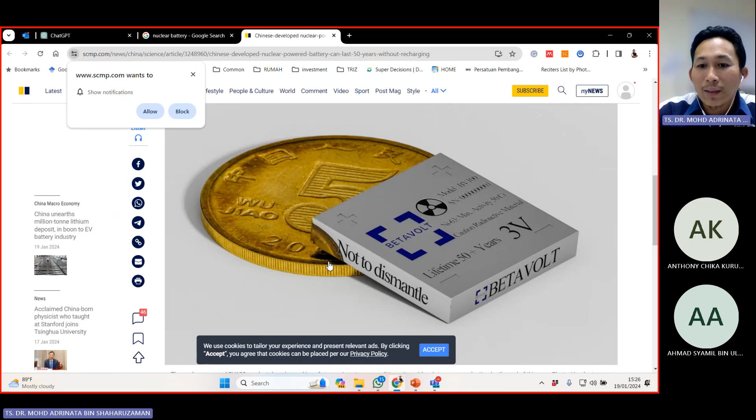Just this week, this one - nuclear powered battery, this is news from yesterday. Chinese developed nuclear powered battery that can last 50 years without recharging, smaller than a coin, and it lasts longer. So this is just research in China for battery.

So the current research is about making the net energy density of the battery higher, so you have a smaller size battery with high capacity that can move the car. Then it will be ideal for us to use electric vehicles rather than put an extra weight of 500 kilograms onto our car to put the battery on the vehicle. So that's the issue.

And how do you compare how big, how much volume, 1 kilogram of iron metal is? Okay, 1 kilogram of iron metal is something like this. But how big is 1 kilogram of cotton? Same 1 kilogram mass, but the cotton is, I think, the size of your whole room for 1 kilogram, something like that. So that's the comparison of the energy density of the fuel, of the gasoline and the battery.

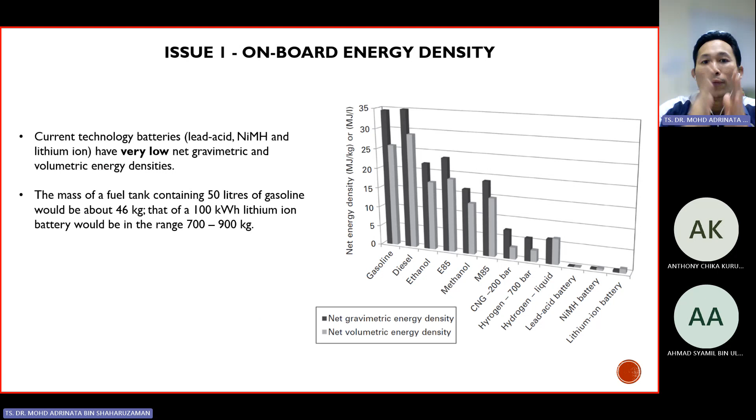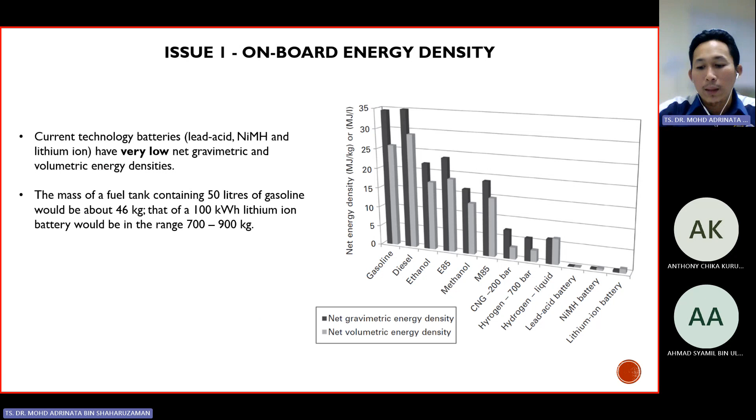Of the fuel of the gasoline and the battery. Okay, so we want the smaller size but give higher energy.

Next, it is about cost. If you add something new technology, it will cost you higher. So the key to enabling widespread availability of sustainable transport is to provide a solution which customers can afford to purchase. It's all about market survey. So we want the new technology with lower price.

Okay, so if we compare something like vehicles that we have, let's say Honda City, Vios, with new technologies of ADAS system, Toyota preventive system, something like that. So comparing Honda and Toyota at 100,000 ringgit, with Perodua Ativa, Perodua Alza at 75,000 ringgit. So that's the comparison of affordability by consumers. We want to introduce the new technology with lower price.

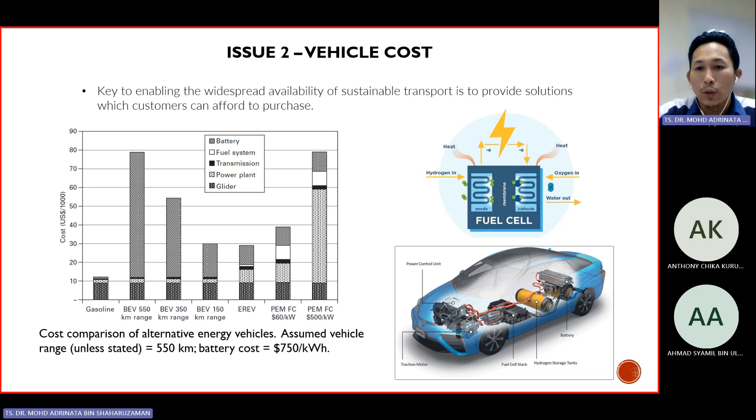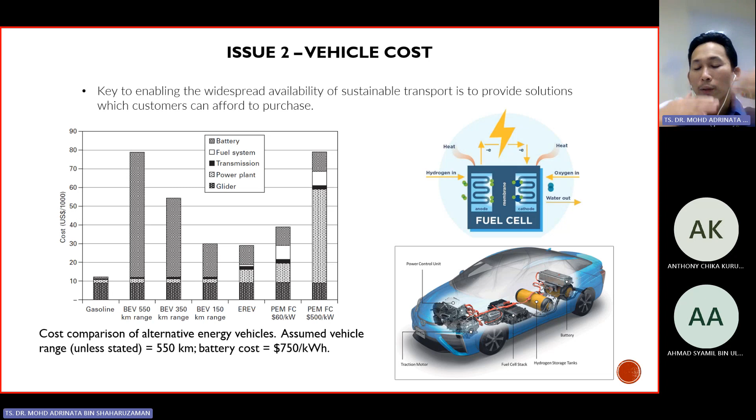We need the electronic control module to define which one we need to use - either petrol, gasoline, or the battery. That's how we use the electronic control module, so the jerking of starting and stopping the ICE engine will not be felt by the passengers. That's the study.

Next we go to the market penetration of biodiesel. Biodiesel has been used in Malaysia - about B7 and B10 biodiesel. I think biodiesel is up to B20 as of now, but research is currently going on for more than that - B30, B50 still in research.

Renewable liquid fuels are potentially a pragmatic route to decarbonizing transport because they provide an evolutionary transition for both vehicle technology and fuel distribution infrastructure. The EU dominated production of biodiesel in 2009, 15 years back, at 54%. Then US, Brazil - about 75% of EU biodiesel is made from rapeseed.

So we have rapeseed oil, soybean oil, palm oil. Asian countries like Malaysia and Indonesia use palm oil. China and India produce 2% and 1% of the world's biodiesel.

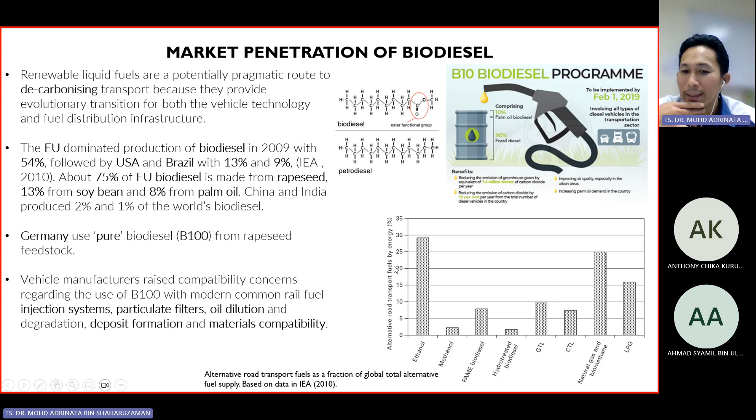Hydro-treated biodiesel, GTL, CTL, NGV, biomethane, LPG. Natural gas is NGV, LPG is what we use in Malaysia - we use LPG gas in cooking.

Let's look at the penetration of alcohol fuels back 10 years ago in the market. Alcohol fuels have a great octane number, so high octane, reducing knocking - a knocking inhibitor in gasoline, until tetraethyl lead came to dominate the market. Before this, alcohol fuel was very good, but tetraethyl lead caused health concerns because of the lead.

Plumbum - the US produced 56% of the ethanol consumed by the road transport sector, Brazil 33%, and European Union 4%, in 2009.

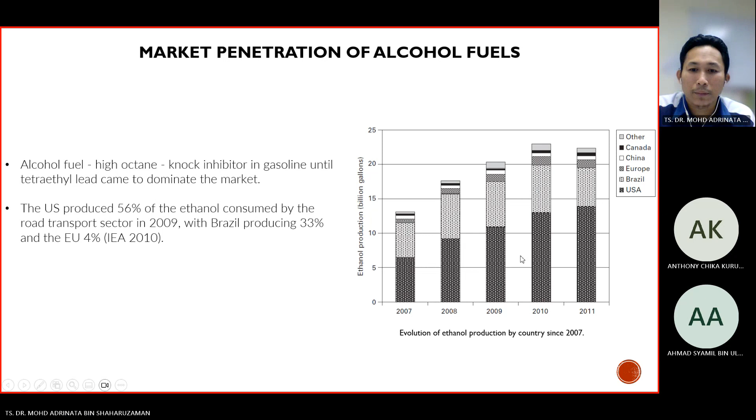So that's the fuel. Now alternative and renewable liquid fuels to improve the environmental performance of the ICE engine. This part is explaining the engine fuel for the engine, how to move the car.

From pure petrol, gasoline, pure diesel, going to ethanol, methanol, biodiesel, and up until the fuel cell - PEM, proton exchange membrane fuel cell.

Fatty acid methyl ester is dependent on the distribution of fatty acids in the original oil - this comes from rapeseed oil, palm oil, and soybean oil.

The original fatty acid is from the oil. The cetane number of biodiesel: soybean methyl ester 45 to 60, rapeseed methyl ester 48 to 61, palm oil methyl ester 59 to 70. So this is the cetane number of the bio oil.

The wide variation of fatty acid methyl ester composition has effects on low temperature operability, fuel pour point, fuel oxidation stability, compatibility with the vehicle fuel injector, oil deposits, and fuel dilution on the engine lubricant - this comes up with the wear and tear of the engine.

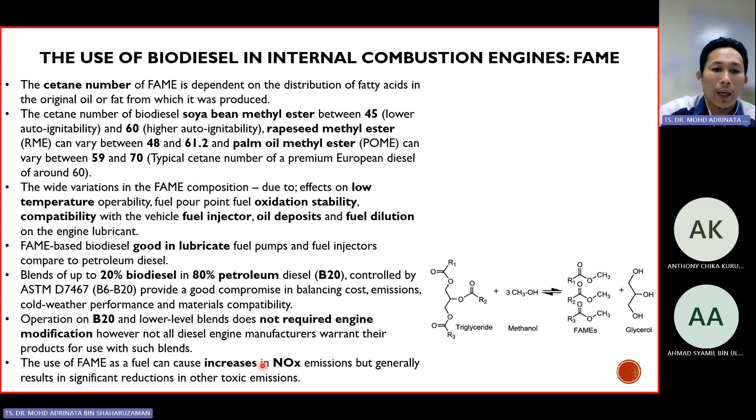Apart from the biodiesel of soya bean, rapeseed, and palm oil, we have also alcohol fuels, for spark ignition engines, for petrol engines. Alcohols have been used as a component fuel blend with gas, or as the dominant fuel blend constituent themselves - single C, double C, and 4C: methanol, ethanol, and butanol. In fatty acid methyl ester based biodiesel, however, the presence of the oxygen atom reduces the energy density of the fuel.

In 2006, Nakata used a high compression ratio in a naturally aspirated petrol fuel injection spark ignition engine, and found that torque increased by 5%. Normally in a petrol engine, the compression ratio is around 10 to 11, like 10.2, 10.3, 10.5.

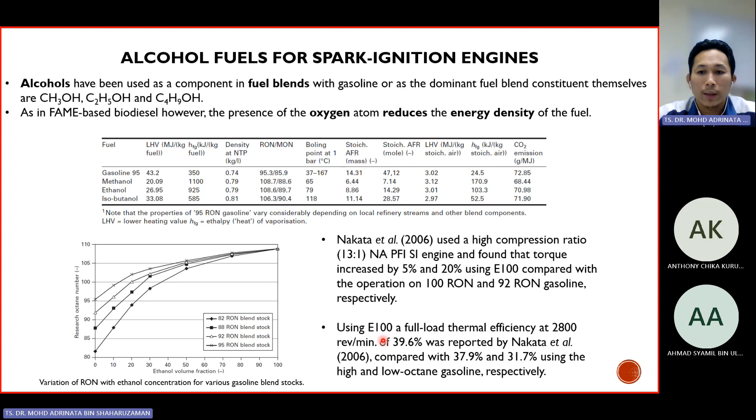Next, vehicle and blending technologies for alternative liquid fuels: ethanol gasoline, methanol gasoline, bi-fuel vehicles. Bi-fuel vehicles have two independent systems - some kind of hybrid, but two fuel systems, each separated for storage.

So for major applications, the main fuel used in a downsized engine would be gasoline. The engine will be modified to operate with higher boost pressure and compression ratio, and alcohol will be directly injected to help suppress knock at high load. So the alcohol will only be used when necessary.

For gasoline and alcohol bi-fuel operation, some kind of diesel plus CNG (compressed natural gas) with pilot injection of diesel for ignition purposes is also possible. Future dedicated spark ignition compressed natural gas engines are likely to be used widely since the cost of diesel injection equipment is very high. Spark ignition is petrol compared to diesel. Natural gas brings a reduction in greenhouse gas emissions over 20% due to its high hydrogen-to-carbon ratio - hydrocarbon plus oxygen ignites to give CO2 and H2O, that's the ideal way of combustion.

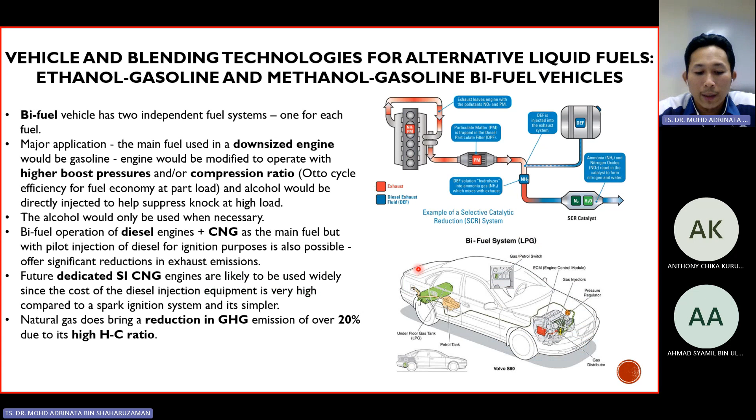I think this is the last part for gaseous fuels.

At ambient temperature and pressure, gaseous fuels are much less energy dense than liquid fuels. Gaseous fueled vehicles can require a significantly larger volume of fuel to travel a comparable distance. Gas transportation fuels include fossil natural gas, biomethane, LPG (liquefied petroleum gas), and also hydrogen.

Natural gas has potential to reduce emissions from buses and taxis which operate in congested urban environments around the world. Demand has increased due to shale gas reserves. China, Argentina, and Algeria have higher shale gas reserves.

Most compressed natural gas fueling stations are connected to a low pressure supply of around 2 bar, which is then compressed to a higher pressure for on-site buffer storage, and lastly dispensed into vehicles at 200 or 250 bar. As with other liquid fuels, once natural gas has been liquefied, the most practical long-distance transportation mode is bulk transport via ocean tanker.

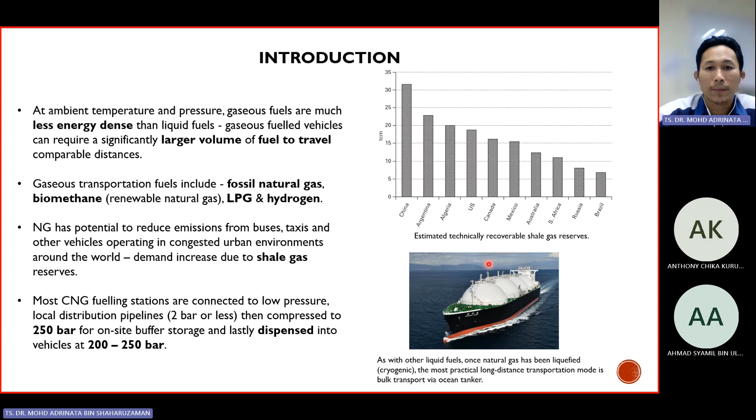Natural gas has a high octane rating, around 120, giving increased power in spark ignition engines. Natural gas occupies a larger volume in the engine, so you need a bigger cylinder tank than for liquid fuels.

Same as what we discussed before for the volumetric efficiency and net energy density of the battery and also petrol. So comparing gas and petrol, gas requires a much larger volume tank compared to petrol.

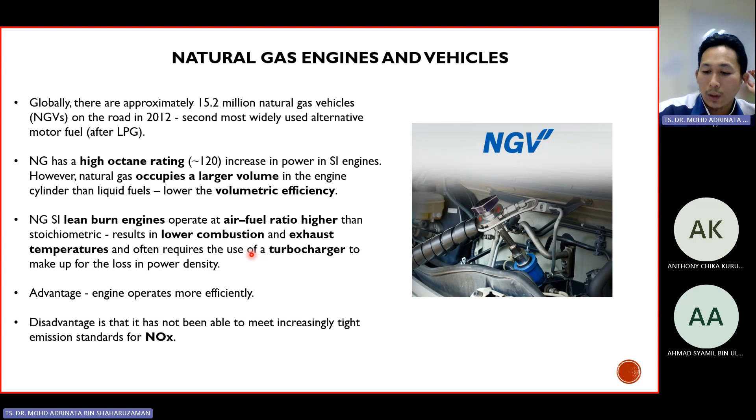Biomethane is a renewable gas. It comes from waste from livestock, crops, wastewater, and food waste. We put it in a digester bin, and it will be fermented and expel the gas. This is also called digested biogas, which we can use as biomethane, and the residue to fertilize soil or for livestock beddings.

The decomposition of organic matter - manure, sewage, municipal waste, green waste, plant material, food waste, and crops - goes into the anaerobic digester. Unlike fossil natural gas, which is composed mostly of hydrocarbons with 70% or more methane, plus propane and butane, biogas contains somewhat less methane, along with carbon dioxide, water, nitrogen, hydrogen, carbon monoxide, and contaminants.

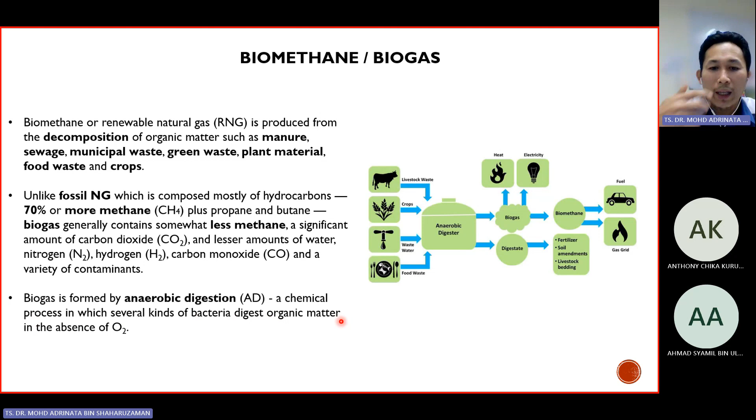Biogas is formed by anaerobic digestion, some kind of fermentation. In Malaysia, alcohol fermentation - like tapai for Malays - is something similar, producing gas that you can later use to move vehicles. So biogas is formed by anaerobic digestion, a chemical process where several kinds of bacteria digest organic matter in the absence of oxygen.

This is the biogas plant. From livestock farming, biowaste, stalks, manure, whatsoever - put it in a bin collector, then into a fermenter tank. With light and oxygen excluded, the biomass is digested by anaerobic microorganisms - bacteria that work in the gas tank and storage to produce the gas.

After the gas is produced, it goes to storage, the gas treatment plant, the biofuel gas station, and then it goes around again and again. For the residual materials, the sludge in the tank will be used for crops, biomass, and agro production. So this is how biogas and biomethane are produced, which is a renewable gas.

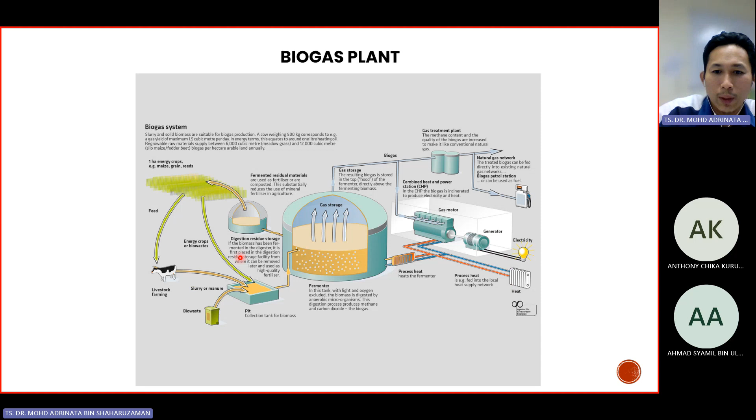So LPG. We have looked at biofuels and biodiesel, we have looked at NGV, we have looked at biomethane, and now we look at LPG. Liquefied petroleum gas (LPG) is the most widely used alternative motor fuel. LPG is Europe's leading alternative fuel, with approximately 10 million vehicles.

LPG gas is the same as our home gas. 10 million vehicles were using it in 2013, but I never see it used in Malaysia - I don't know why, maybe because we had NGV before this.

There are 3 grades of LPG: HD5, which is 5% propylene; HD10, which is 10% propylene; and commercial grade, which has no limit of propylene.

LPG has a high octane rating and is amenable to spark ignition IC engines. LPG is an attractive automotive fuel that can be used to move our cars. Shale gas in North America is expanding the supply of propane and other natural gas liquids as shale gas producers respond to low natural gas prices.

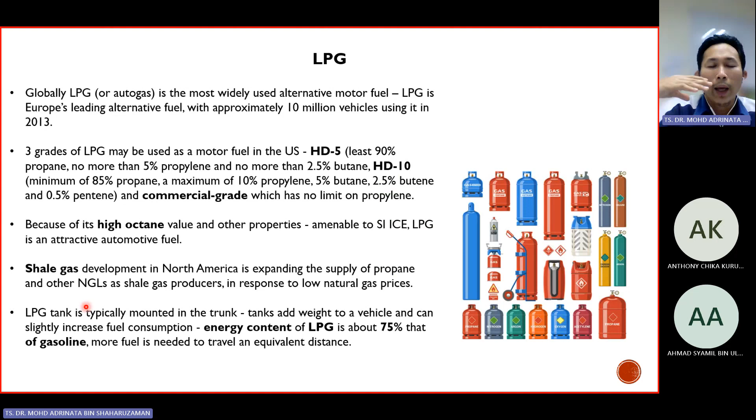Back in 2010, 2015, NGV and LPG is the technology that thing will be replace ICE engine. But from my readings, it is currently going lower compared to electric vehicles.

LPG tank is typically mounted in the trunk boot at back of a vehicle. So there's pros and cons. You need to plug and play, it's just like you add additional load to your vehicle, and it will increase fuel consumption.

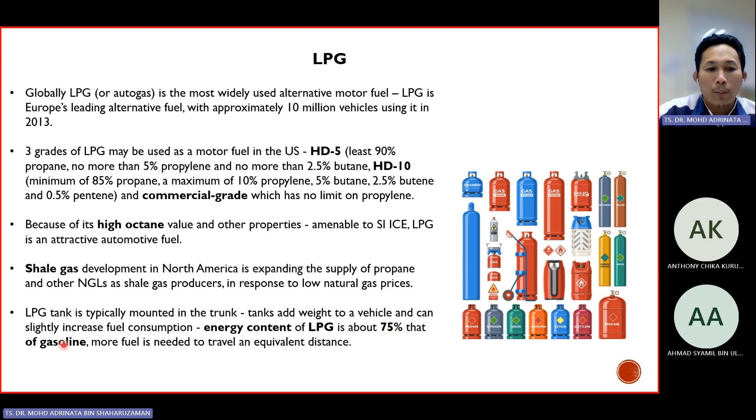Energy content of LPG is about 75% that of gasoline. More fuel is needed to travel an equivalent distance. Last but not least, we have hydrogen.

We call it fuel of the future, because hydrogen gives zero emission energy. They claim zero emission energy because hydrogen moves the car and then combines with oxygen, and the waste is water.

So hydrogen offers an appealing prospect, limitless supply of carbon-free and zero-emission energy, although it can be burned in internal combustion engines. Doing so does not provide the energy efficiency needed to offset its low energy density.

For H2 to realize its potential, it must be paired with highly efficient fuel cell electric vehicles. The challenge is producing mass market FCEV to compete with ICE engines and producing H2 in economic quantities.

So we know H2 and H2O. From H2O, we need the process called electrolysis. The process of producing hydrogen gas from electrolysis must be rapid, so as to provide the energy to our car to move.

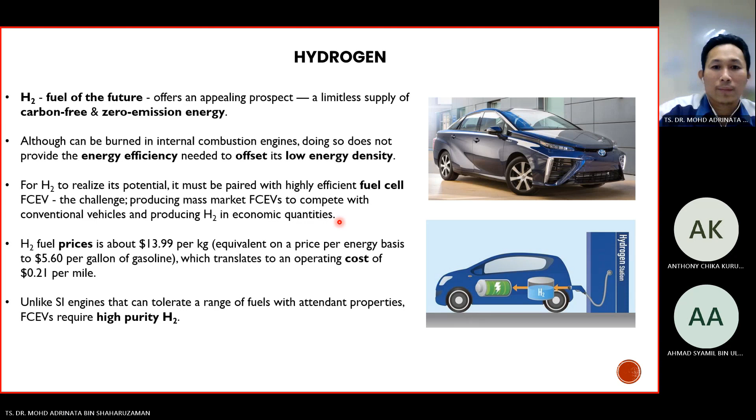Hydrogen use only pure H2. In nature there is no hydrogen, but it is combined with oxygen, and we call it H2O. Hydrocarbons, fossil fuels, CH, carbohydrates, and other compounds. So H in H2O, in hydrocarbons (HC), in carbohydrates, in ethanol, methanol, all family.

Electrolysis is the most common method used to split H2 from water. Reforming is the most common method of separating H2 from hydrocarbons. So for hydrogen production, you need to produce the H2 from water, and then put it in the tank.

For hydrogen production via steam reformation, we have methane and H2O, and then we get H2 and CO, carbon monoxide. This is not good. With electrolysis, using electricity at anode and cathode, we can produce H2 and O2.

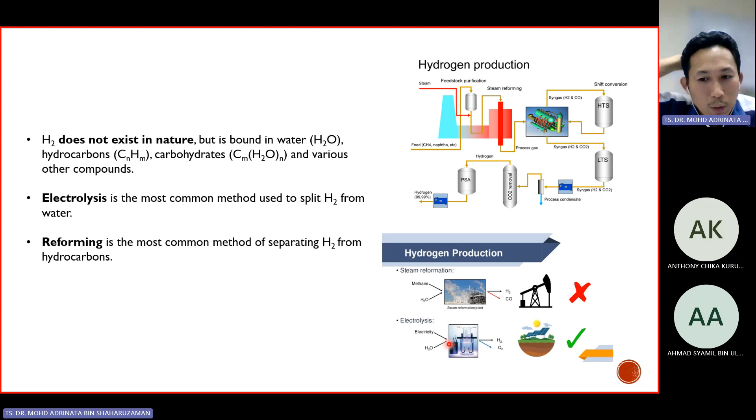Instead of using a battery to store electricity, FCEV uses fuel cells. We call it fuel cell electric vehicles. It uses an electrochemical device that produces electricity as needed from hydrogen stored on board the vehicle.

So we have anode, cathode, and fill in hydrogen. H plus is moving through the membrane. Electrons move to create electricity flow, so that electron flow will move the motor, which is the load. The electron and H plus combine with the air, and this creates dissipated water that goes to the exhaust.

This fuel cell technology is the proton exchange membrane. Fuel cells are considered most suitable for vehicular application because of their rapid startup and response and high power density. The main benefits of FCEV are high fuel economy, 3 times greater than gasoline ICE, and zero tailpipe emissions.